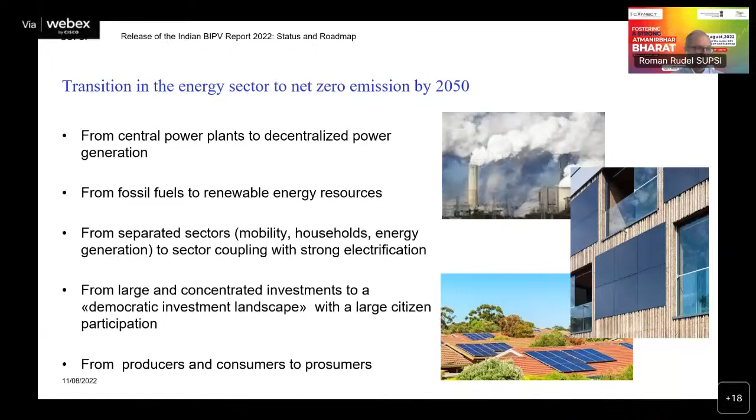Of course, this transition - and please, we can shift to the next slide - is not such an easy process. Now, you have the ambition in India to make a leapfrog, but even when you want to make a leapfrog, the process is not so smooth.

I just wanted to remind you with this slide of a rather interesting multi-level socio-technical transition process approach, which is becoming more and more popular also in Europe and the United States, showing that there is really a multi-level and multi-actor landscape involved in this transition.

And it's not so easy that every technical innovation will then also succeed in the market. I don't want to go deeper into this, but just to remind you, it is really a complex puzzle, and you have to bring a lot of elements together to make this transition successful.

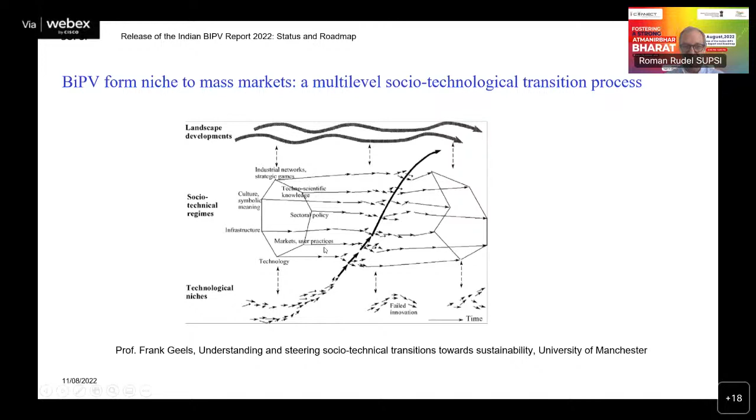With the next slide, we can say that, for example, in the EV sector, we have had this kind of success, and we have also reached the so-called tipping point where there is no return on this development. It's normally accepted that this is about 5% of new sales - in markets where you have more than 5% of EV sales, you have reached this tipping point, and this will then strongly accelerate the process and help shift to the new situation.

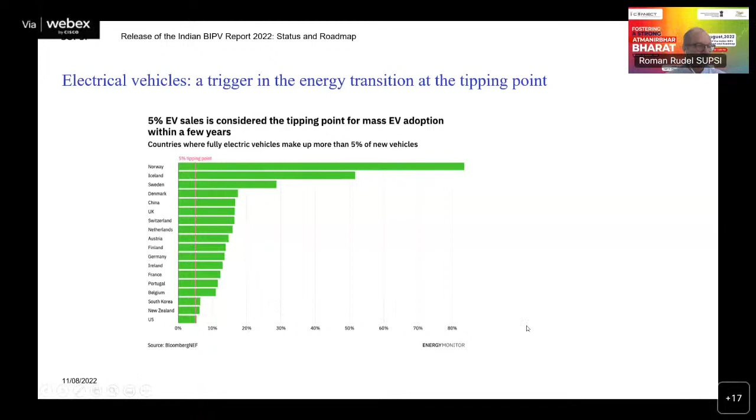Now, in BIPV, I don't think we can say already that we have reached the tipping point, but with the release - and this is my last slide - of this important status report, which also gives a roadmap on BIPV in India, I think we have reached an important point in this transition, and I hope we can soon show that this is also demonstrated with a market share where we can say BIPV has reached the tipping point in India.

So I think it's really important that we have this status report, and I'm very proud and honored to have participated in it, and of course I'm very curious about the reaction of the public, and in particular also of the Indian industry.

And we are also ready, of course, to participate in further research, further support to accelerate and to really help leapfrog in the renewable energy area in India. So thank you very much for your attention, and sorry for these short technical problems with connection to India. I would like also to wish you a successful event, and hope that there will be a lot of reaction and a lot of new ideas coming out of this meeting. Thank you very much.

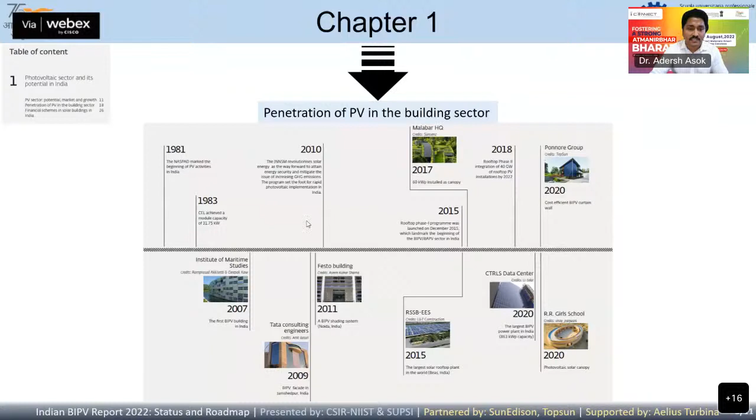Our solar PV tariff has met a record reduction of similar to 2 INR per kilowatt hour, marking the effect of the solar national mission. This section reiterates the evolution of the PV sector in the country, with a few milestones for its adoption in the building sector, highlighting huge potential for solar adoption there. The first chapter also discusses the renewable power sector of India and financial schemes for existing building solar schemes in India, and compares the global acceptability of rooftop installation.

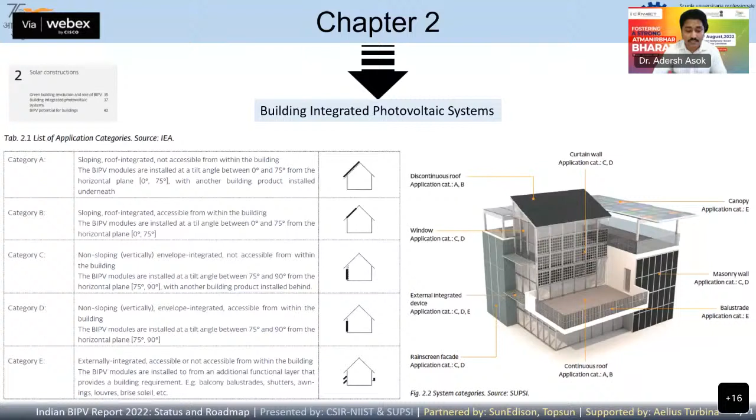As you can notice here in this section, we discuss the classification of BIPV, different BIPV elements, and we have also tried to define BIPV and discuss the application of BIPV elements adopted for building schemes. This section is expected to avoid the ambiguity that exists in the case of BIPV definitions.

We have also covered the solar potential analysis of different regions, as you can see in this chapter, with the BIPV score that we have come up with. An interesting fact to note here is that in the southern region of India, in Thiruvananthapuram, the orientation between east to southeast has more BIPV potential than facing south, as in regular rooftop installation. More details can be found in our report, as this is an important point for policymakers to think more seriously about, considering vertical installation for inclusion in financial schemes going forward.

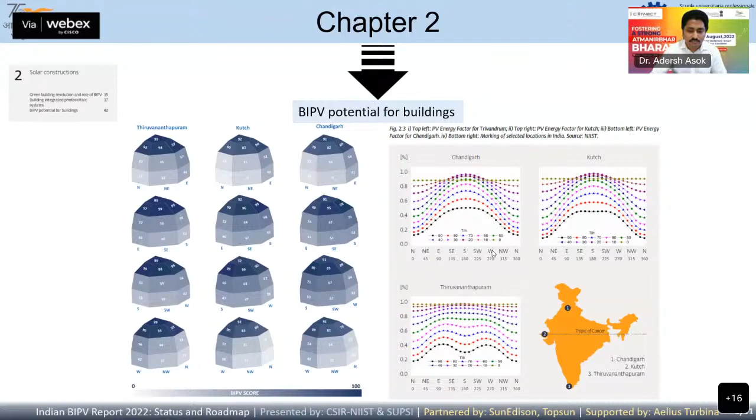In the third chapter, we have focused on five factual contemplation levels to initiate and define a collective and concrete roadmap for BIPV implementation in the country. This includes government policies, initiatives and business models, multifunctionality and cost reduction, technology readiness, both on the supply chain and certification requirements, and innovation landscape. Basically we focus on the research projects and engagement of the international community, which is a prerequisite for getting different BIPV product segments into the country.

In the fourth and final chapter, we have included a few representative case studies to analyze the BIPV sector and its installation in the country. Basically, it will highlight the potential of BIPV in the country. The awareness is growing in a larger way, but favorable policies will take it forward to more fruitful outcomes in the near future.

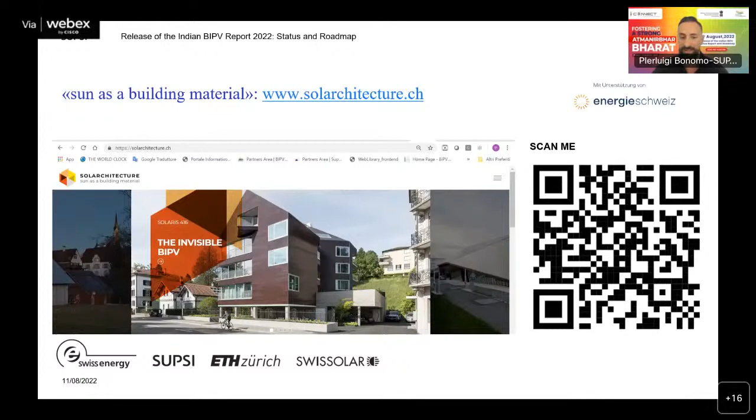photovoltaic technology. And I reported here the reference platform for solar architecture that we set up some time ago with the collaboration of ETH and Swissolar. And I invite all of you to take a look at this website, because you can find all the latest realized examples where PV technology is used and implemented as a real building skin material.

But on the other hand, from an optimistic point of view, we can also say that in Europe we had a very fruitful development period, since we have available on the market more than 200 products today, and also more than half of the installed capacity today is in the European area.

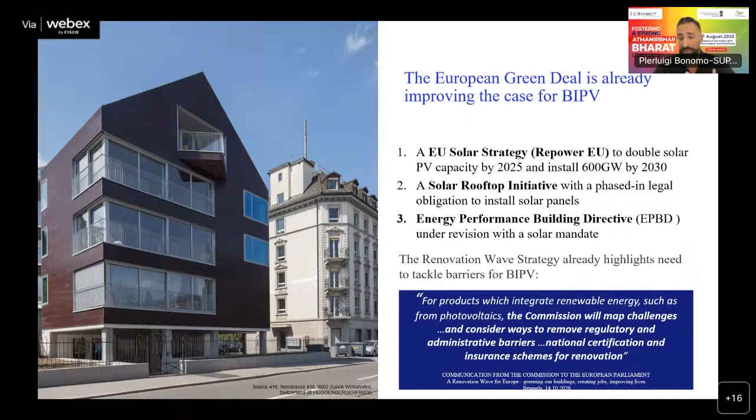At European level, we have a lot of initiatives, just to mention Green Deal and Renovation Wave, which are really a huge strategy, really highlighting the need of implementing BIPV and of joining construction challenges such as renovation with active building schemes. So what's the role of research in this framework, and which are the main activities of SUPSI and of our research group in this framework?

And I started with this slide, which already presents the results of these activities, since we can say that a very strong relation between applied research and industry and market during the recent and past years brought ready products to the market today. So today we can rely on multifunctional products ready for marketing and for real implementation in the building scene. And I reported here some Swiss examples to provide the evidence that we managed to address a really huge portfolio of different and flexible solutions.

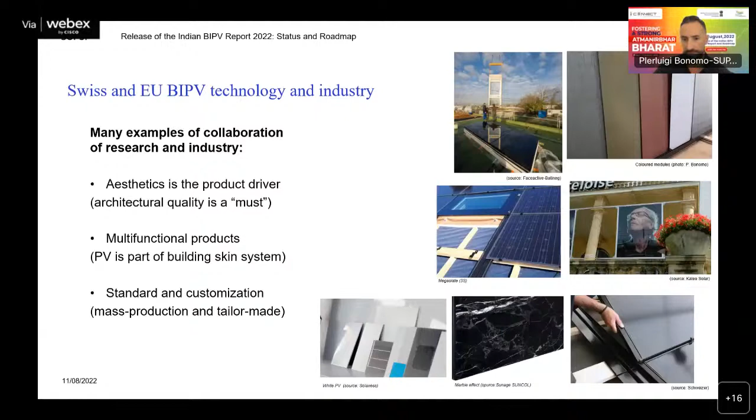So key steps of this transfer process are the validation and the qualification of products. And we have a PV testing lab at SUPSI for providing indoor testing, qualification and assessment of the technologies. But more and more we work at a real scale level, focused on real scale mockups where we can observe and test technology in real operating conditions. And last but not least, in pilot projects. This is a key step for assessing the technology at a real building scale and in an operational environment.

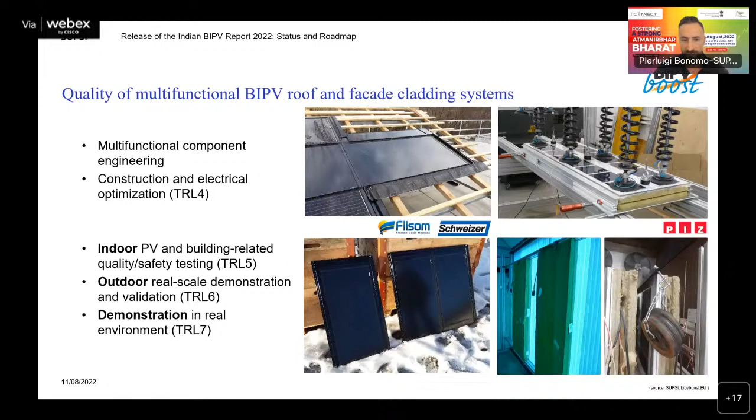I just want to conclude this part by saying that pilot projects are a key part of this technology validation. So more and more we are working with real architects and real players of the value chain to construct buildings with active facades. Just a few examples here, but my colleague Paolo Corti will briefly report about one specific project.

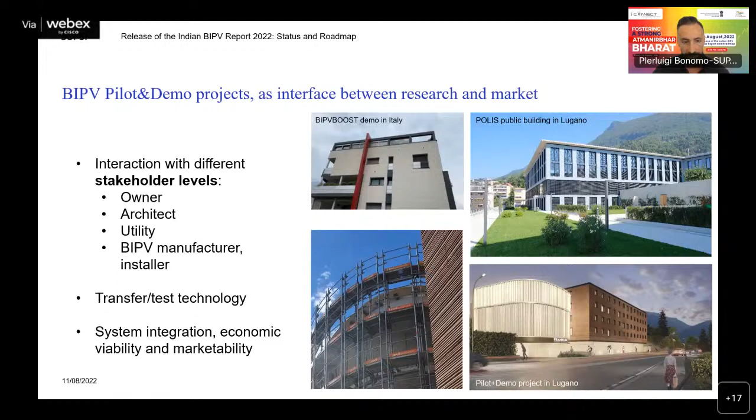So how to sum up the challenges of BIPV? This would be quite an ambitious goal, but I will try grouping four main key aspects, mapping the main challenges that we believe are the key drivers for implementing this technology on the market.

So first of all, the industry, the manufacturing. Here, of course, it's needed to combine standardization and customization, which are the two trends which BIPV needs to put together and to optimize. On the other hand, products need to be implemented on the market. And here the topic of certification of the products is crucial. In Europe and in Switzerland, we know this topic very well.

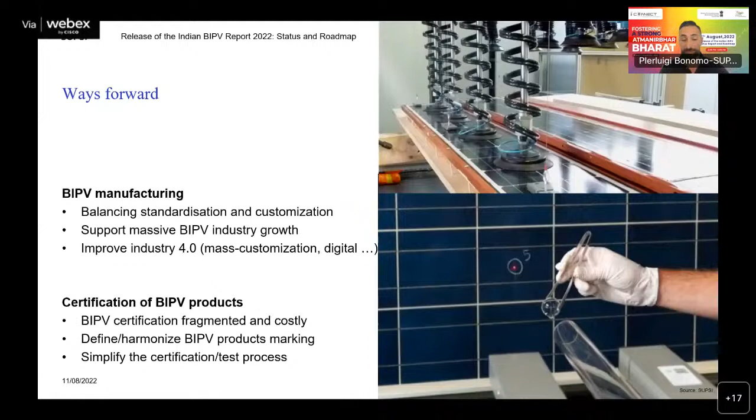We are working very deeply on defining new testing procedures and new methodologies, because basically BIPV is a multifunctional technology. So we really need to bridge together the construction world and the photovoltaic and electrotechnical world. So this is more and more important. I'll just finish with the other two ways forward that I would like to list today.

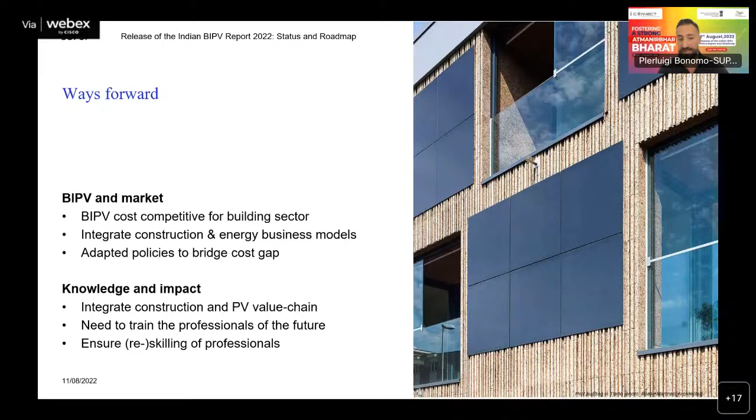So technology is the starting point, but as Dr. Rudel said at the beginning, we also need to favor the real impact on the market. So this means that cost competitiveness is a key challenge for implementing BIPV in the building sector, and also creating knowledge. So creating new skills among professionals is a key challenge for us to ensure this technology evolution.

I just conclude with a thank you to the working group of this status report, because I think we addressed a specific topic like building integrated photovoltaics, and we also tried to draw up the roadmap for this technology. We are really glad that we had the possibility of learning some first perspectives about the Indian context, and we are really committed and interested to foster strong BIPV implementation in India. And I'm really proud that our group, which met in 2019 and exchanged this memorandum of understanding, today managed to realize this first milestone and report.

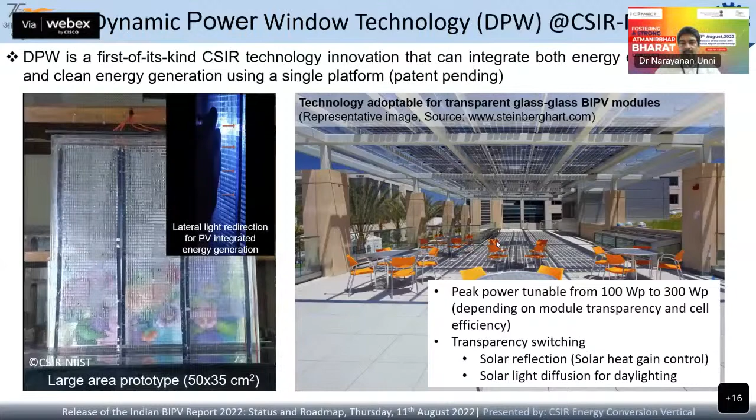So you can have solar heat gain control and you can have solar light diffusion for daylighting. So this is a concept which is shown here. This is a technology adaptable for transparent glass BIPV modules, where the solar light with a diffused rendition you see here, you can use it as the indoor lighting also.

Now, the next one is the DSSC module fabrication facility for building integrated photovoltaic and indoor photovoltaic at CSIR NIIST. We had a project funded by Department of Science and Technology, Government of India. This project was selected in high priority implementation category by Prime Minister's Office, Government of India, wherein for the first time we developed a range of equipment which are required for fabricating large area solar modules. You can see that we can go up to 30 centimeter by 30 centimeter DSSC panels.

And with the chemistry that we know, because National Institute for Interdisciplinary Science and Technology traditionally has expertise in photochemistry, photophysics, material physics, material chemistry, we can actually tune the properties of the dyes that are used in these solar cells. You can have different colors. So not only power generation, but an angle of aesthetics also can be incorporated into these windows.

So these are some of the equipments that we fabricated here. The interesting thing is that earlier people used to import these equipments, but with this project, we could in fact demonstrate that these equipments could be made in India with a cost reduction of 50 to 60% compared to what we used to import. So all the process starting from glass cutting, screen printing, silver dispensing, annealing, dye coating, hole drilling, UV dispensing, UV curing and electrolyte filling. All these are now done in a semi-automatic fashion, and the facility is here.

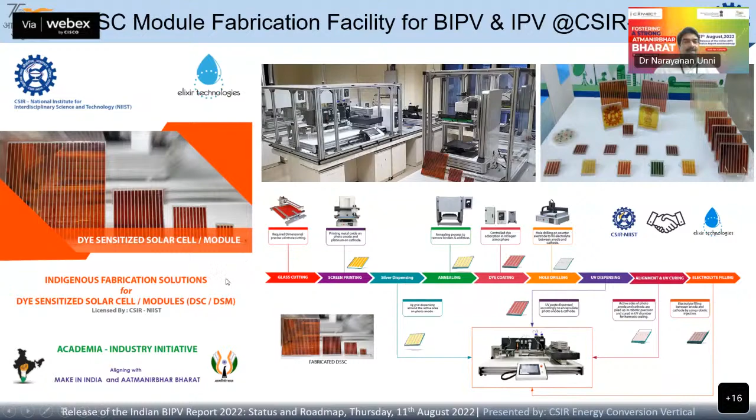So whenever any one of you comes to Trivandrum for a conference or for a personal visit, I would extend an invitation to visit CSIR NIIST and see these facilities, because it is first of its kind in India. Dr. Suraj will give more details about the DSSC fabrication facility because there is another talk coming up, so I will not spend more time on that. Now, the third one is the light concentration photovoltaics, CPV.

Also at CSIR NIIST, we have developed planar light concentrating optics elements, which can give a 5 times concentrated solar flux and also with a high solar acceptance angle. Normally, we know that concentrators are there, but the solar acceptance angle is not great. But in our case, with suitable optics and modification of the microstructural design within the panels, we can have higher solar acceptance angle, and it can be easily adopted for BIPV architectural facades and all.

And see here, an example is given here. Whatever solar flux is incident on this will be concentrated again to the edges because of the optical design. And with that, you can see this fan is running. And also, again, you can have colored solar tiles. It's not only the normal transparent in nature, but other than that, you can incorporate pigments or polymeric materials into this, and you can have different colors. Again, as I mentioned, not only energy generation, but it can have an artistic or aesthetic angle also.

And with that, you can control the transmission. You can see that each of the edges here, these junctions, there are solar panels. We don't see that, they are hidden. But at the same time, you can tune or design these panels so that you can have a particular wavelength which will be allowed to transmit. So that is the color that is shown on the ground. So this, on an ideal level, is proven at CSIR NIIST, but it's a long way to go. In fact, there's a lot of ramifications in building design and construction of facades.

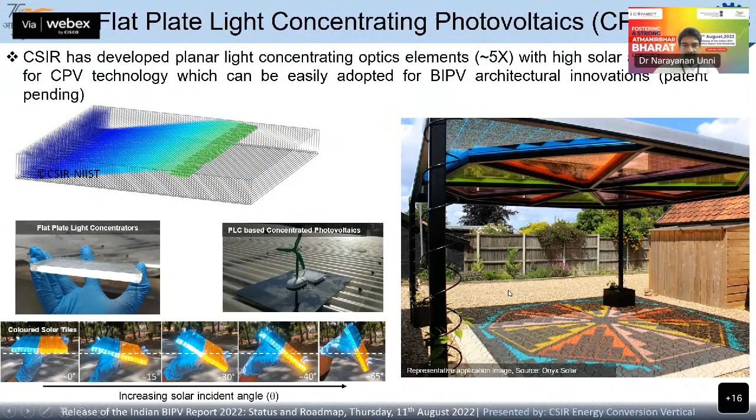Another important activity from CSIR NIIST is rooftop agrivoltaics. As we all know, agrivoltaics is also getting a lot of momentum nowadays. There's a program by Government of India called PM KUSUM. KUSUM is Kisan Urja Suraksha evam Utthaan Mahabhiyan. So that is the program for increasing the yield of farming along with generation of energy. So in Hindi, we say Annadata, a farmer who provides food, he will become Urjadata also. Urjadata means who provides energy.

And agrivoltaics is there for some time, but simply planting solar panels in fields will just lead to solar desertification only, because you cannot keep anything under that. It is only a shady area. But with our innovation, now we can control the transmission. Diffuse optics is possible, so you can have certain plants which can have low lighting conditions. And this is very good also, because when you control the incident light, sometimes leafy vegetables like lettuce, their leaves will become larger to absorb more light energy. So that increases the yield of the cultivation also. Along with that, you can generate power. So that is the idea behind rooftop agrivoltaics coupled with optics.

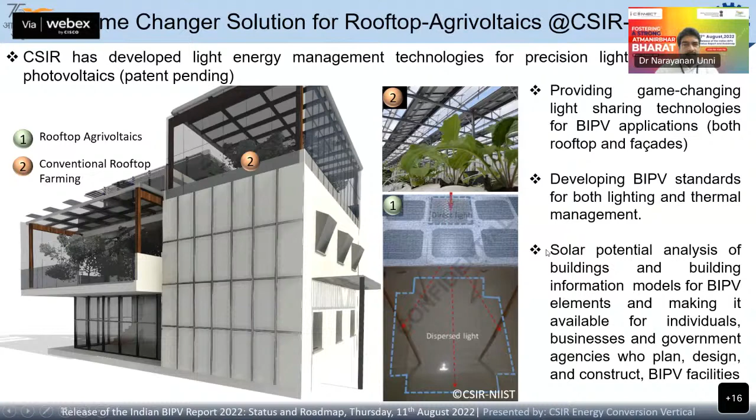And then immediately the application is that it can go to rooftop. Instead of having solar panels on your rooftop, if you use this rooftop integrated with agrivoltaics, then you can have your cultivation, agriculture also on the rooftop. And it can have different manifestations. It can be horizontal, it can be vertical with a large acceptance angle. And the solar potential analysis of buildings and building information models, we are also working on that, particularly for BIPV elements. And we can make it available for individuals, business, and government agencies. So modeling studies and providing feasibility reports, all these are possible with the current expertise available at CSIR NIIST.

Now, CBRI, Central Building Research Institute, another constituent lab of CSIR, they have an activity on efficient flat plate solar water heater. Solar water heater is already there, but the innovation here is that the scientists at CSIR CBRI are using a double glazed solar collector. With that, they can achieve the highest efficiency. For example, when the plate temperature is at 100 degrees Celsius, the efficiency is 60%. The industry standard is around 30% only at the moment at that high temperature, 100 degrees Celsius.

And the working principle is simply convection: hot water is collected in the tank through natural convection. The important features are, as I mentioned, a double transparent glass cover is used to reduce the convection losses. The heat loss coefficient of a double glazed collector is much lower than that of a single glazed collector. So that is the innovative element behind the realization of this solar water heater. And they have the expertise in doing the numerical modeling and the heat distribution. All those things can be done.

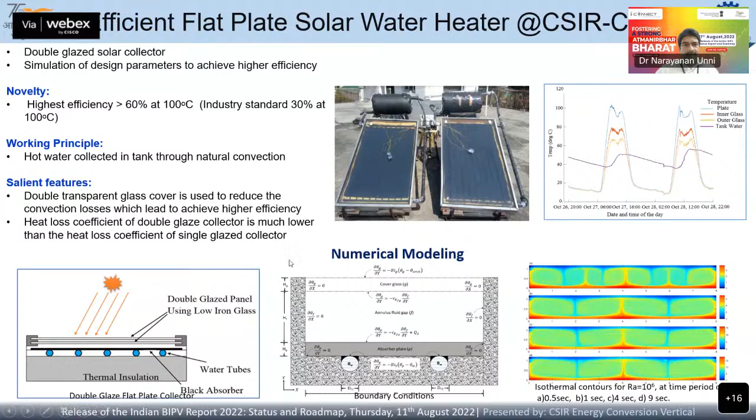CSIR-CSIO, Central Scientific Instrumentation Organization, as the name indicates, is good at designing and developing equipment. There is activity on designing and developing equipment required for photovoltaics, and also in particular for building integrated photovoltaic.

PV elements are becoming an integral part of the building. Professor Roman was mentioning that we are at the tipping point, 5 to 10% adoption, meaning the technology is ready to be adopted by the general public. We believe at that time there will be requirement of equipments, inverters, and other things. So CSIO, a constituent lab of CSIR, is ready with such expertise.

They have measuring devices for testing and evaluating the performance of both grid connected and off-grid solar photovoltaic systems, which can be installed in buildings and industries. They also propose to develop a solar photovoltaic performance analyzer for BIPV, because the performance analyzer for simple solar panels may differ from what is useful for BIPV. These considerations should be taken when designing a performance analyzer or system for BIPV. CSIO is doing that.

CSIO has also created facilities under CRTDH, a program by DSIR, Department of Scientific and Industrial Research, called Cooperative Research and Technology Development Hub. This will test a 30 kVA solar inverter with a regenerative grid simulator, anti-islanding testing device, the way you connect and disconnect from the grid when power failure happens, loading rheostat, programmable DC power supply meter, grid connected inverter, signal oscilloscope, DCCT power adapter for multi-channel, and digital power meter.

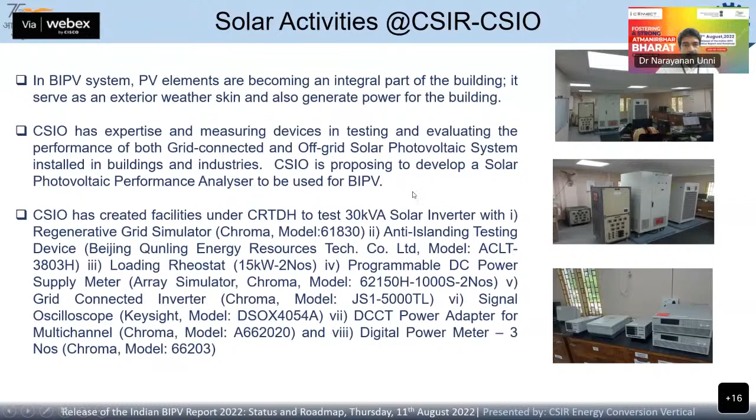Some of these equipments are simple, but so far we have been importing them, and now with CSIR we have in-house capability and expertise to design and develop these equipments.

CEERI is the Central Electronics Engineering Research Institute, a lab specializing in electronics. As the name indicates, they are working on the electronics of solar PV panels and accessories. CEERI has developed a solar PV-based EV charger for 2- and 3-wheeler applications. Presently, work is going on to develop charger systems which can work with grid or solar input.

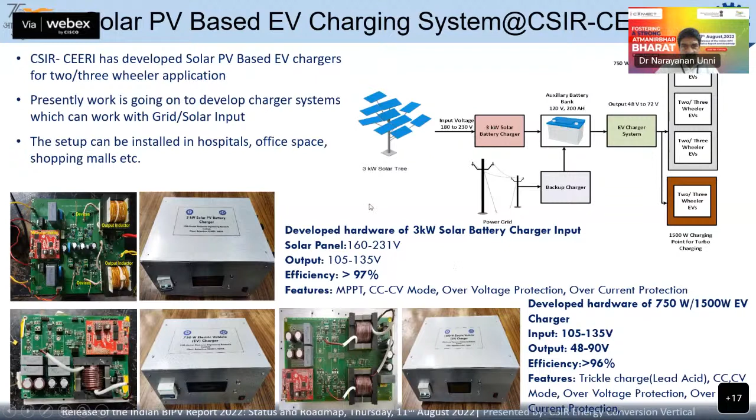This hardware is developed. A solar panel of 160 to 231 volt can be used with output of 105, 135 volt. Efficiency is 97%, with maximum power point tracker, constant current, constant voltage mode. All these things can be done with the system developed at CSIR-CEERI.

CSIR-CEERI also has, in the Jaipur center, an NABL accredited solar grid tied inverter test facility. NABL is the National Accreditation Board for Testing and Calibration Laboratories. They have given accreditation to the solar grid tied inverter facility developed by CSIR-CEERI at the Jaipur center. You can see these certification numbers for MPPT efficiency, inverter efficiency, photovoltaic systems, and islanding prevention measures.

This will become very useful once we have a specialized BIPV testing and validation facility, which we are trying to develop. At that time, all these things will become very useful, and these are the specifications for the system they developed.

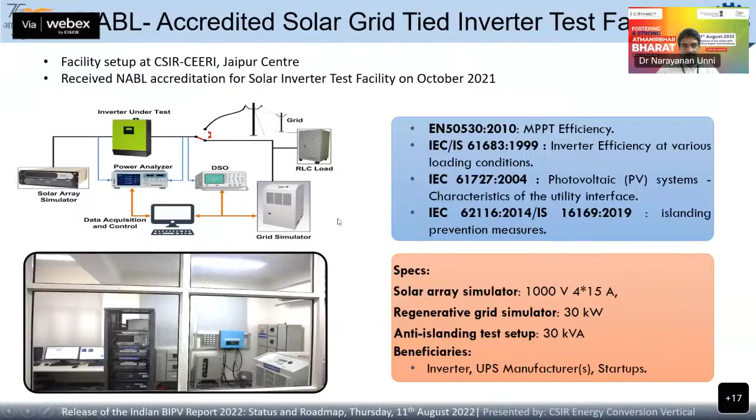As I mentioned in the beginning, a lot of activity is happening in almost all 14 labs working with the energy theme, E2D theme, in materials, because it's the basic building block of any building integrated activity. In dye-sensitized solar cells, which can lead to BIPV, we have activity on photoanodes, new dyes, electrolytes, device structures, and indoor photovoltaics, which is again a unique feature. We can proudly say that CSIR catalyzed the activity of indoor photovoltaics in India, particularly at NIIST.

NIIST, NCL, CLRI, IICT are the labs currently working on DSSC. There may be a few other partners also, so I couldn't put all the names here, but these are representative examples, not a limiting case. In perovskite solar cells, again novel materials and device architectures. In organic photovoltaics, non-fullerene acceptors, donor materials, donor-acceptor porous organic frameworks - CLRI, AMPRI, IICT, these CSIR labs are working on developing these materials.

CSIO has an activity on flexible graphene films, which can go a long way when we have building integrated large area fabrication. The transparent electronics discussed in the morning at length - whether we need to go with ITO or silver nanowire films or any other technology - here they have a solution with graphene films, which is also now coming up.

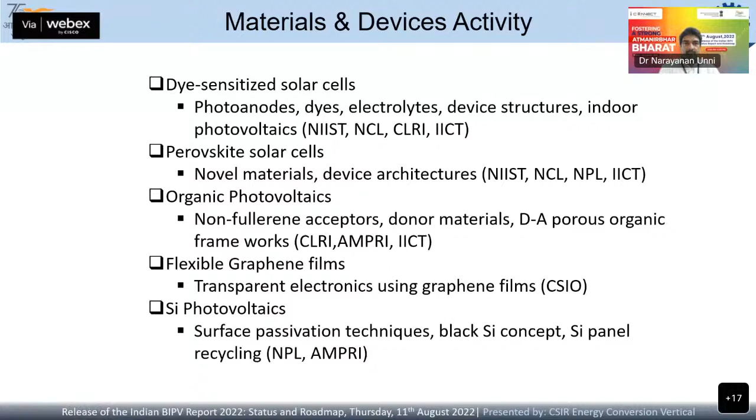Silicon metrology is also a very important activity. National Physical Laboratory, a CSIR lab, is the nation's metrology lab for standards, so it is their mandate to develop standards for solar panels, which they are currently doing. I hope with time there will be separate standards for BIPV as well from NPL. AMPRI is also working on surface passivation techniques and modifications for silicon solar cells. That is, in a nutshell, the CSIR labs' activity tied to building integrated photovoltaics.

In the Sustainable Development Goals of the UN, this work ties into affordable and clean energy, decent work and economic growth, industry innovation and infrastructure, quality education, sustainable cities and communities, partnerships for the goals, and climate action, which is again a very important topic. We have a serious presence in these sectors where we try to address some of the problems haunting humankind. With that, I was able to give a glimpse of activities happening in various CSIR labs on building integrated photovoltaic related activities. Thank you all.

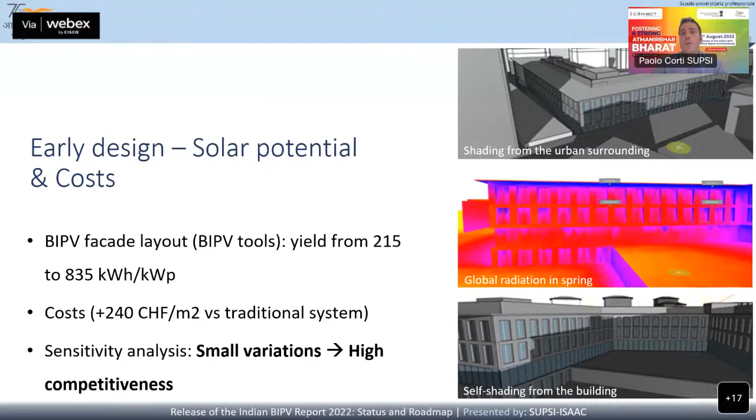The second stage in which we were involved is the early design stage. We support some stakeholders to assess the solar potential and the cost of the photovoltaic facade. In particular, we define the layout of the BIPV facade by using different and specific BIPV tools, such as BIMSolar, in order to calculate the solar radiation on the facade, but also the shading or the self-shading from the building or from the urban surroundings.

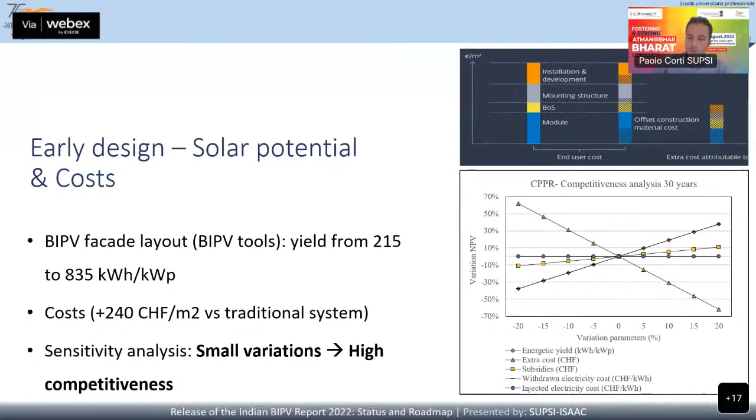Regarding the cost aspects, we define the real cost of investment by using the cost breakdown and the extra cost method. You can find more detail in the status report. We also produce a sensitivity analysis, and I would like to highlight that in this economical analysis, we saw that small variations of specific parameters, including energy yield and extra cost of subsidy, for example, could bring high competitiveness in terms of revenues of the BIPV solar system during the entire lifespan of these solutions—a 30-year analysis in this case.

Within the technical phase, we supported the BIPV manufacturer in testing and in the certification according to the IEC standards of the BIPV product. In addition, we also collaborate with the BIPV installers in the design of the electrical system. I would like to highlight our main results regarding the colored BIPV module: we measured a 25% power output reduction under standard test conditions, due to the color applied on the glass of this BIPV module. This was calculated against a standard non-colored photovoltaic module.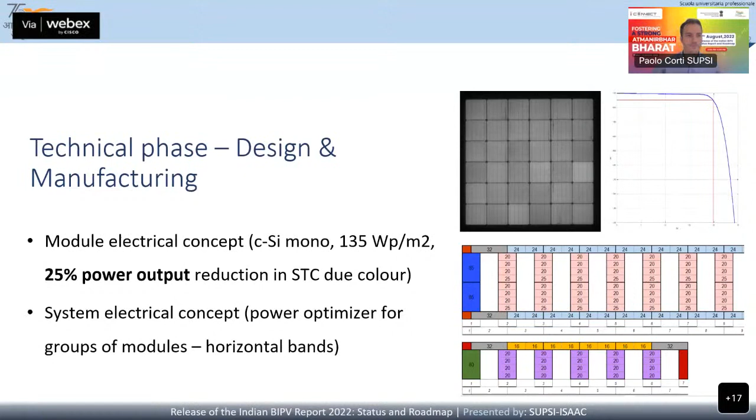We are working now at this monitoring stage. We monitor the photovoltaic production and the energy demand of the building, in order to assess a comparison between the simulated data calculated with a specific software in the previous stage and real monitoring data in terms of production, but also cost. In addition, since we have to validate and demonstrate the technology, we are also measuring some technical aspects of the BIPV module installed on the facade.

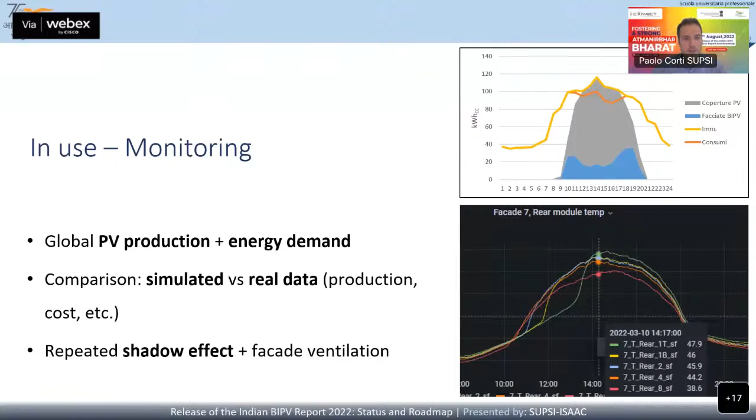So once again, we were involved in this complex BIPV process, and again we realized how complex the entire process is in order to make a BIPV installation. However, we also discovered, and this is a suggestion I would like to show you, that focusing on the decision-making process from the beginning permits anticipating all of those strategic decisions that are important to reduce risk and problems during the BIPV construction stage. In addition, interdisciplinarity—the interaction between all the stakeholders of the BIPV value chain—is a key takeaway for a successful BIPV project.

If you are interested to know more about this case study, please scan this QR code. You will find more information on the website, solararchitecture.ch. And thank you very much for your attention.

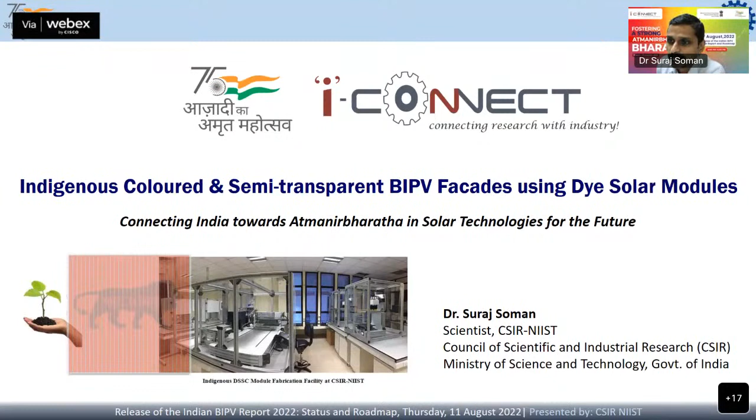Suraj, your voice is not coming. Is it coming now? Yeah. Oh, okay, fine.

As Dr. Ashish Lele mentioned in the introduction talk today, decentralized energy generation is something that we all need to focus a lot on. The major target is to generate electricity from renewable resources, of which photovoltaics, particularly the first generation, which occupies more than 95% of the market, has a major thrust. But one thing that needs to be looked into, particularly for developing countries, is gigawatt-scale installations and the unprecedented solar photovoltaic expansion happening around the globe.

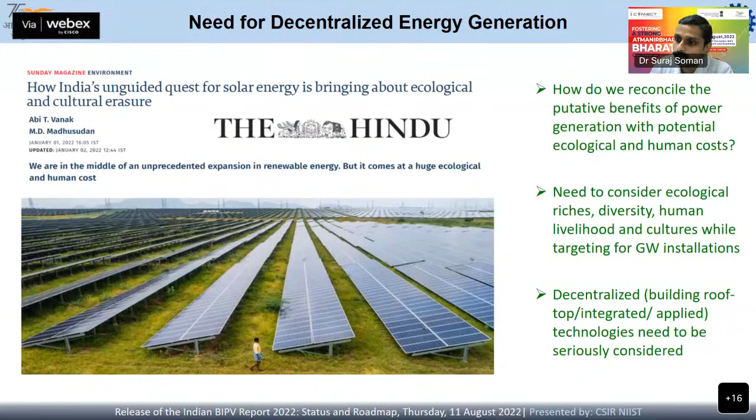This can lead to huge ecological and human issues related to diversity, livelihood, and cultures, particularly in places where there is no barren land. So that keeps the vision more focused on decentralized energy generation, where we need to target building rooftop integrated technologies for future generations. That is the relevance by which more focus needs to be given to the building integrated photovoltaic sector. Over the years, the majority of the BIPV market was occupied by roofing and walling.

And it is projected that in the upcoming years, facades are going to take more or less the same kind of market as the roofing sector. When we look into facades, it's particularly the glass area, and parameters like aesthetics, transparency, and colors need to be considered. That involves the area of research we are presently focused on, the third generation photovoltaic technology called dye-sensitized solar cells.

In simple words, it's artificial photosynthesis, mimicking the same process that happens in a green leaf in a device. It has a dye molecule, and you can change the color of the system by changing this dye molecule, changing the absorption spectra. It is incorporated inside a device with two conductive glasses and a semiconductor, to which the dye is adsorbed, and an electrolyte. There are multiple advantages. One is the semi-transparency. You can have any kind of color by changing the dye system.

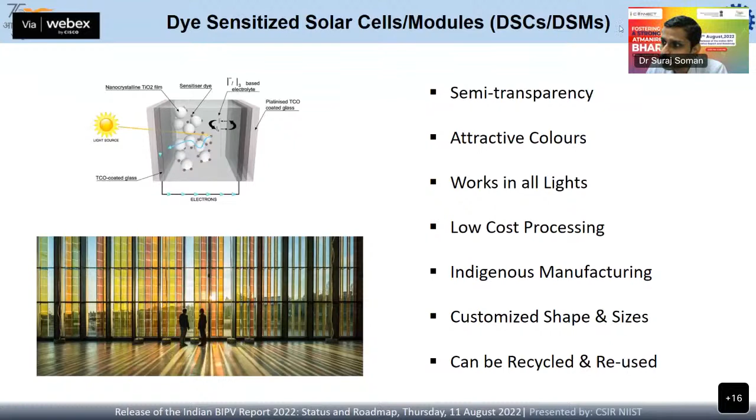Most importantly, it works in all kinds of light conditions. It doesn't need to be sunlight itself. It works well in artificial and diffused light, so it can have bifacial applications. Low cost processing, much cheaper materials, and less energy consuming processes are involved in manufacturing, and you have the possibility to move into indigenous manufacturing. You can make it in different shapes and sizes as per the requirement. Above all, these devices can be completely recycled and reused, leading to a circular economy.

Looking into the history of this technology, it was discovered way back in 1991 at EPFL in Lausanne, Switzerland, by Professor Michael Grätzel's group. Over the first 2 to 3 decades, the target was basic science development. It's not a mature technology like silicon or thin films, but in the last 2 to 3 years there were large installations: a 2 kilowatt installation at EPFL, the Science Tower in Austria with 25 kilowatts, and in China a 500 kilowatt installation of BIPV modules using dye-sensitized solar cells, really opening the eyes of the world to what can be done with this technology. Still more efforts need to be placed so that it can overcome the valley of death and move from science to technology.

So at CSIR NIIST, we are working in a truly interdisciplinary way, at the interface between chemistry, material science, device physics, and engineering. We are targeted at end user applications, and accordingly custom modifications are done on the molecules and material side. We target applications in building integrated and transportation integrated photovoltaics, portable electronics, and a major target on indoor light harvesting or indoor photovoltaics. And over and above all this, on supply chain development, which is very critical.

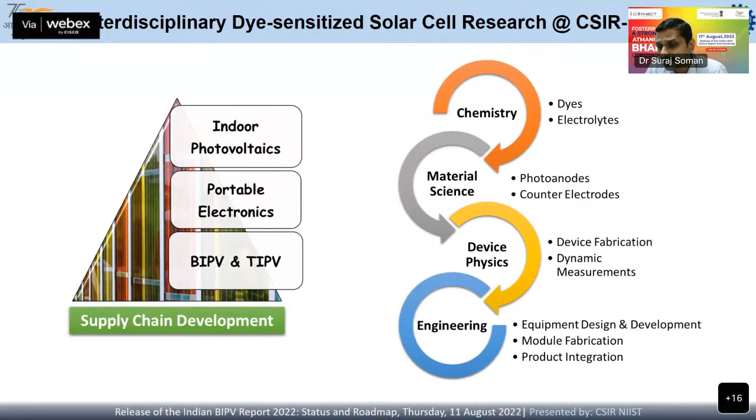This activity has been taken up for more than a decade in this particular laboratory, and also in CSIR through various national funding options like the TAPSUN program. We have gained the capability, understanding, and a portfolio of knowledge in the science and material parts of these device systems. With that, we moved into technology translation, creating an effective value chain from lab to market, from fundamental R&D to applied R&D, then to fabrication and manufacturing.

One of the critical aspects we addressed was indigenous equipment development, because if any technology needs to be sustainable, the equipment used for manufacturing must be produced indigenously, so that the cost of production can be reduced in a bigger way. With support from the DST, we realized true indigenization, developing a series of semi-automatic fabrication equipment for dye solar module fabrication, partnering with Elixir Technologies in Bengaluru, and realized a cost reduction of 60 to 70%. This was a major initiative in the country.

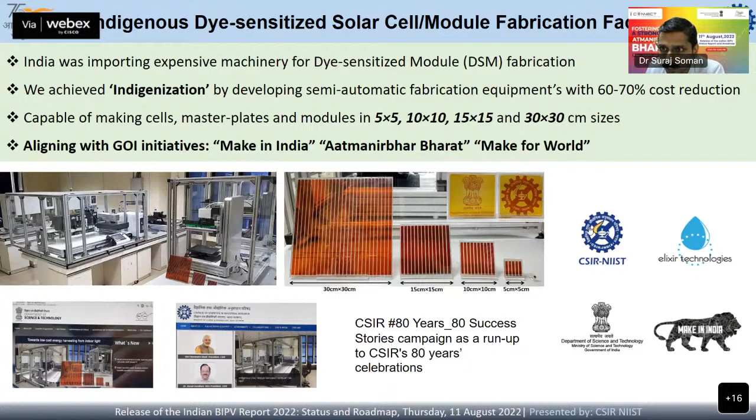We were able to go from small area cells to master plates and modules up to a size of 30 centimeter by 30 centimeter. This aligned with the Government of India's initiatives on Make in India, Atmanirbhar Bharat and Make for the World. It was showcased in various forums and selected as one of the technologies under the CSIR 80-year success stories. Moving ahead, this is the module process flow, as Dr. Unni has just touched upon.

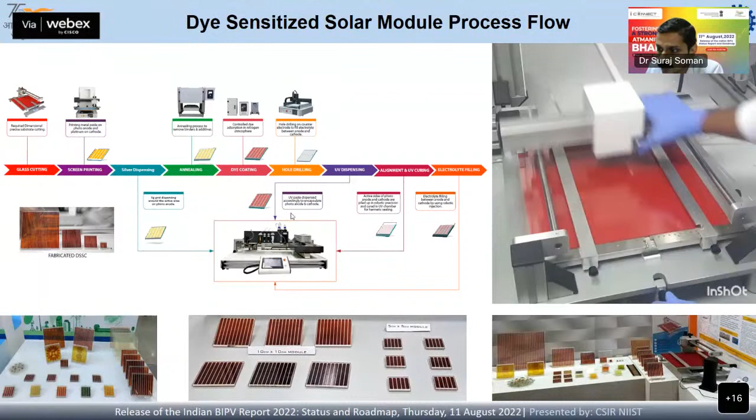We start with screen printing, and then there is a 5-head robotic system used for a range of applications: the silver grid lines, pick and place, electrolyte filling, and various stages of development, finally getting to the prototypes and the final product line.

Another major activity we took up was that once we have the equipment and the process, the most critical bottleneck was the supply chain. Unless you have a supply chain indigenously in the country, no industries will come up and take it into commercialization. So here, with support from CSIR, one of the most critical supply chains was the conductive substrate, normally the FTO, used in these devices. That occupies around 70 to 80% of the cost.

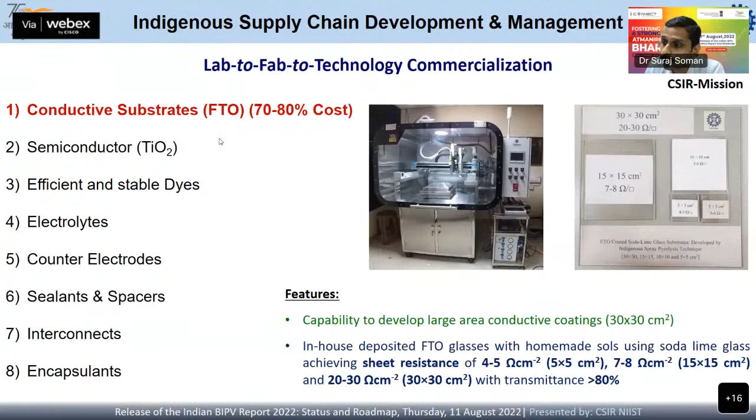In the last 2 years, we have indigenously developed systems by which we can make these conductive oxide coated substrates, benchmarked with performances comparable to what already exists out there. Along with that, we now have the technology and portfolio for a series of other materials and molecules used in this set of devices.

Another major activity: when we speak about building integrated or building applied photovoltaic applications, it's not just the things outside. We need to think from inside the building also, because, as in COVID times, most of us sit inside closed spaces and a lot of energy is around us, particularly in the form of light from artificial light sources. So how can we harness this energy in the most efficient and effective manner and use it for applications like self-powered IoTs and smart applications in this fourth industrial revolution era.

So there we focused on indoor photovoltaics, which has a potential of reaching up to 57% efficiency, depending upon the band gap of the material being used.

And out of the various solar technologies available, dye-sensitized solar cells occupy a very prominent position, with efficiencies reaching up to 35% over the past 2 to 3 years. And it offers the flexibility of integration into various electronic gadgets. And thereby, at the end of the day, what we target is to have a battery-free world and to recycle the light which is around us in various forms.

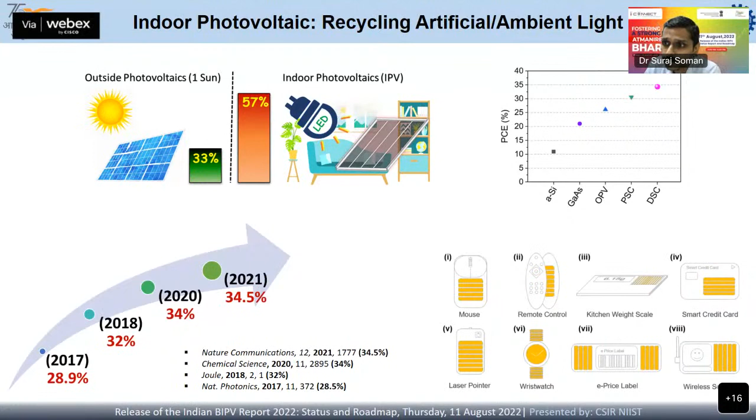So CSIR NIIST presently holds almost 5 world records on indoor photovoltaics, and we are actually the pioneers globally in this area, where under CFL light we have efficiencies reaching up to 35%, under LED light about 30%. Under ambient light conditions of around 6,000 lux, we have reached up to 40%, and particularly from the voltage point, because when it comes to energy harvesting circuits used for IoT applications, higher voltage is actually a prerequisite.

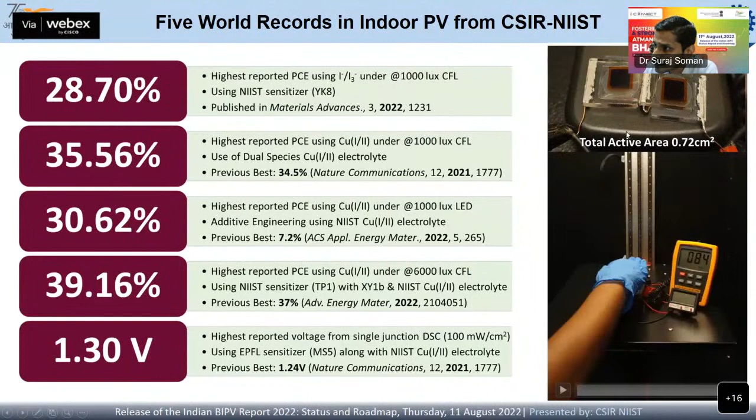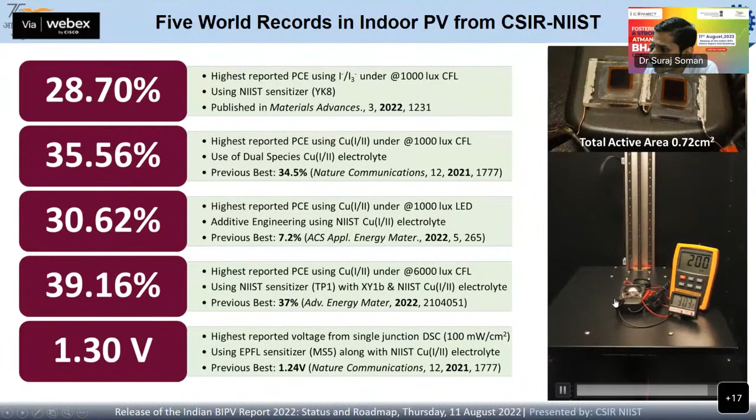So there, with our design principles and use of new materials, we have even reached up to 1.3 volts from a single junction device, so you can reduce the footprint of your devices. Here I will show you a quick video where a device less than 1 centimeter square was enough to power a temperature sensor. The intensity is less than 200 lux, and this less than 1 centimeter square device is able to power that particular device.

So this is where we are targeting, and the performance of our indoor photovoltaic light harvesters has been benchmarked with international standards. There are 2 companies that had released white papers on this indoor PV sector: one is Ambient Photonics from USA and another one is 3G Solar from Israel.

And based on their data, when we compare, we can see that with an active area which is 1/4 of what is being reported by these companies, we were able to generate at least 20 to 30% more power under the standard 1000 lux condition, and the same is reflected under the more realistic light intensities of 200 lux or less, also maintaining the same power density.

So in a nutshell, what we are targeting is to take our expertise in this area, from the science that we have done over the past decade, and the translational research and experience we have gained in technology development, and see the potential in various sectors like building, where not only building integrated systems, but furniture or artifacts inside the building can evolve to generate power in the indoor photovoltaics area.

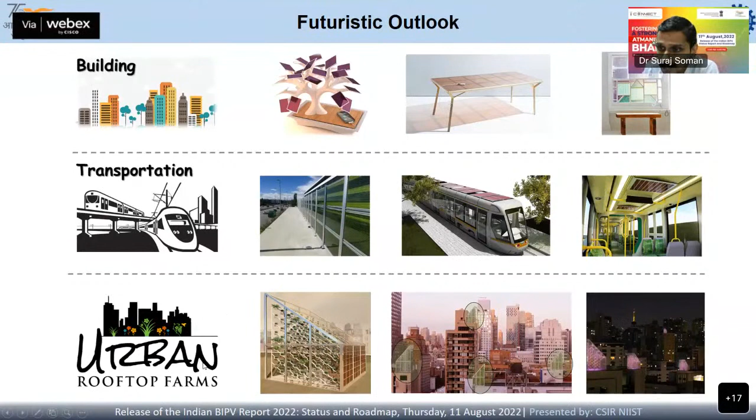In the transportation sector, like noise barriers, or trams and trains, both inside and outside light can be used, and some innovative applications like urban rooftop farms, where colors and aesthetics play a very key role for the future development of this technology.

So to conclude, we emphasize the importance and dire need for harvesting all forms of light, artificial, ambient, diffused, catered to the resurgence of this technology for BIPV and indoor photovoltaic applications in the country. Indigenous manufacturing and most importantly recycling and reuse is possible with this, which contributes towards the circular economy, and an end-to-end decentralized ecosystem and supply chain development is being provided for industries who are interested. And this finally leads to the goal of the government, which is import substitution and Atmanirbharta in solar technologies for the future.

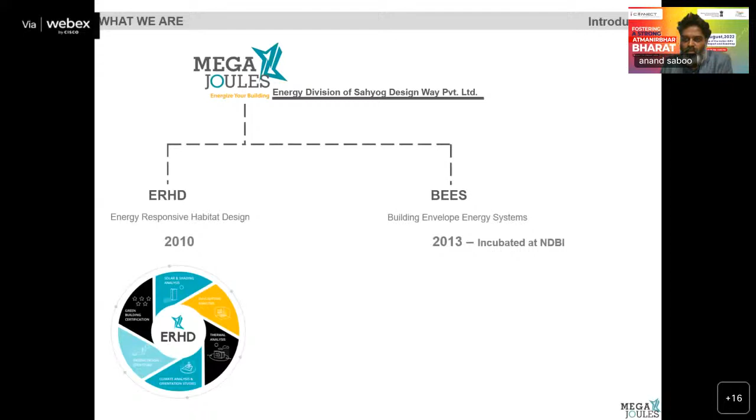We were incubated at the National Design Business Incubator in Ahmedabad, which is the startup wing of the National Institute of Design, where I have done my master's. There we looked at these envelope systems, and we installed our first system into the building where we were incubated. It was a small 1 kilowatt system, installed on the east side of the building, and we recorded the data.

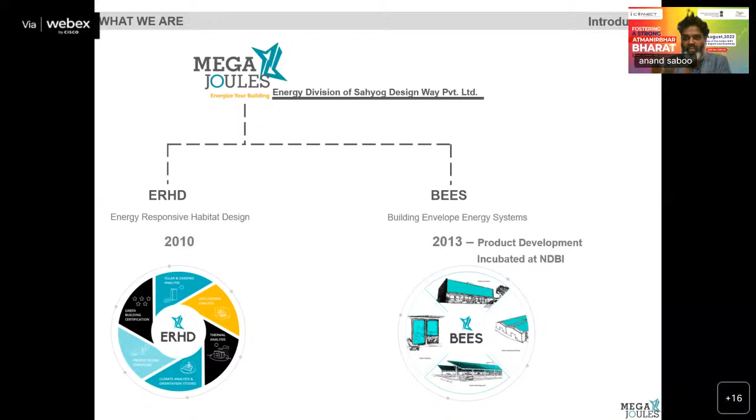We recorded the data, and then we started looking at various projects, and the real-time data was much better than the simulated data which we had predicted. In 2014 we pitched for the project with the data we had looked at for a year. And this is the latest image, from 2022, of Atal Akshay Urja Bhavan, MNRE's main corporate building coming up on Lodi Road in New Delhi.

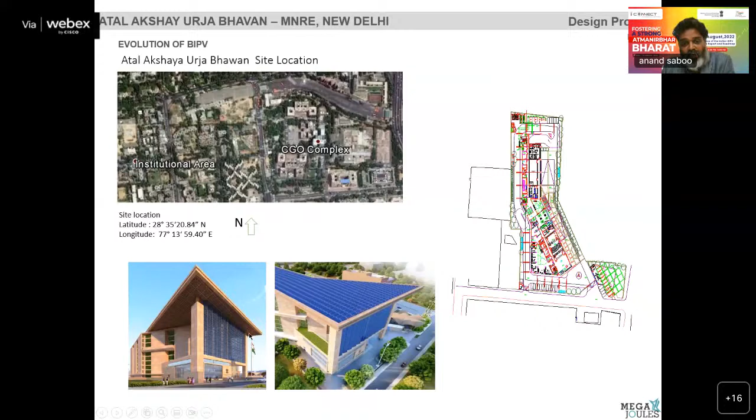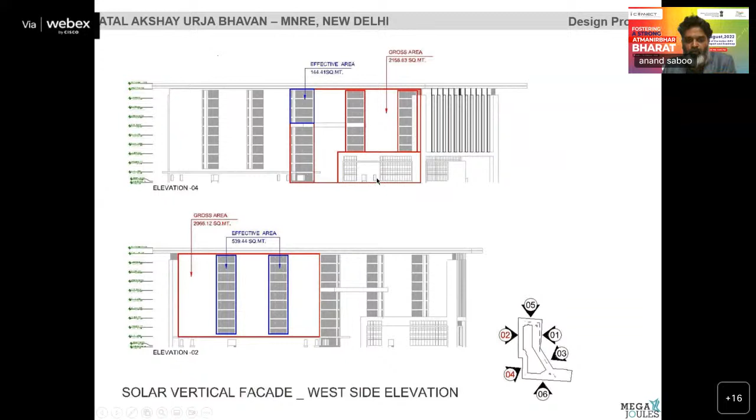We were fortunate to look at this design, courtesy of Edifice Architects, where we assisted them through a complete design process on how they could integrate solar. This is the final image, but the journey started in 2014 with a blank spot where the design was given. So we started its simulation with all 4 surfaces, giving them information on how the western, eastern, and southern sides would perform, looking at the efficiency, using the tool called BIM Solar, which was talked about earlier.

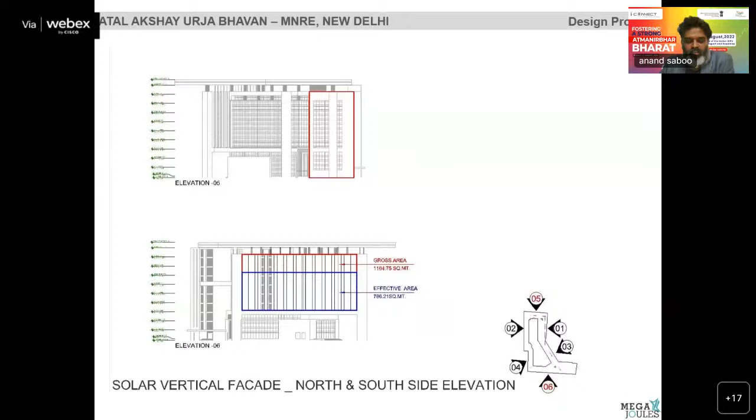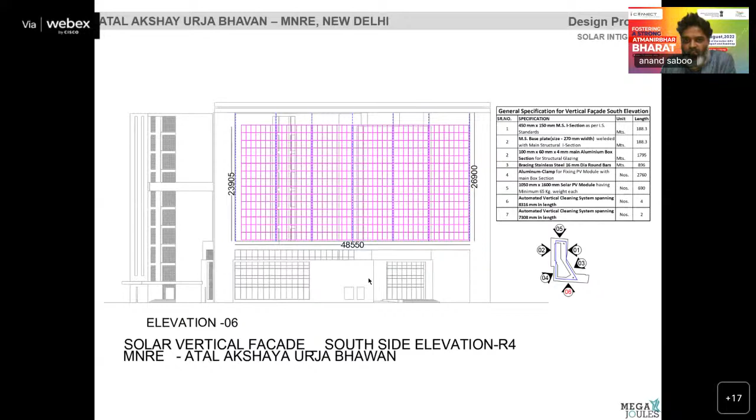We used that BIM Solar tool which was shared with us to generate simulated information. Then there was a final understanding that on the southern side, with that size, we would be developing a 200 kilowatt system. All the data and sizes were given, and then the system was tendered to the company. In the complete process, we had done all the simulations for the southern side.

The initial simulation was done in BIM Solar. At the later stage, people were not equipped with BIM Solar, and that's a challenge. That's a BIPV simulation tool, but we had to simulate in PVsyst to authenticate, because that was the system they were looking at. PVsyst was not that well equipped in 2016. It's a complex building, and the southern facade has to be simulated.

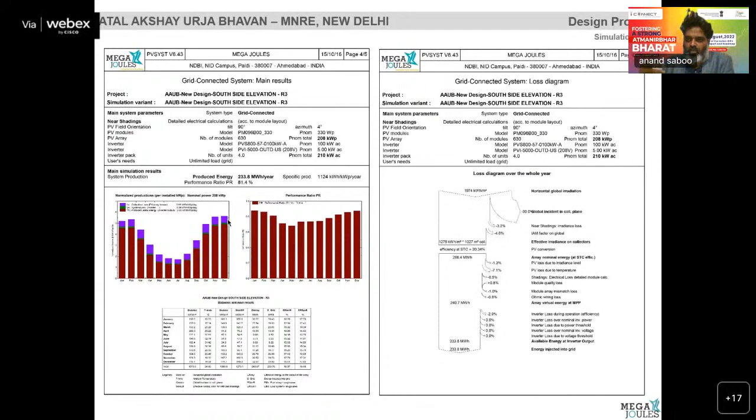We had to simulate it, and if you look at the curve, it's completely reversed from the rooftop curve, because in June and July, the summer season, because of the non-inclined panels, we were getting a reverse curve. That's fine, which we had predicted earlier, and that's how the journey and BIPV behavior in the Indian subcontinent looks.

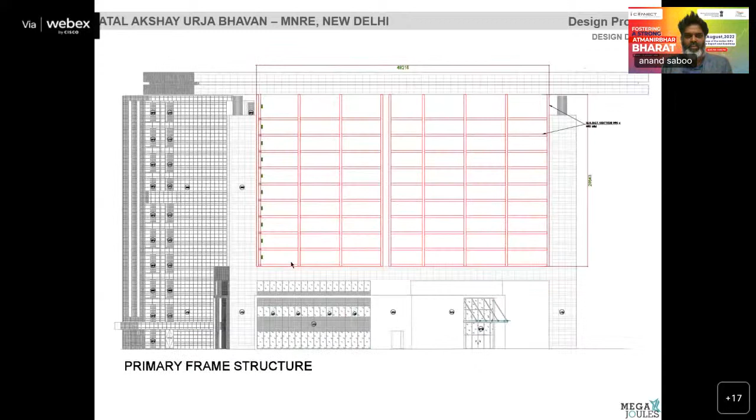And then the detailed drawings and details were also shared in the complete process, and the complete detail of structure and everything, because the wind load has to be taken care of in that aspect. And then finally, what sort of solar panels we have used: monocrystalline systems for this. And various other performance products were reviewed.

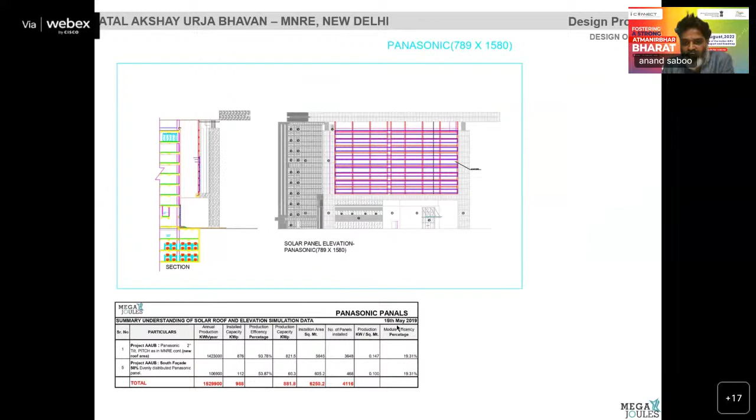This was in 2019. If you can see, it was Panasonic; their SunPower panels were also reviewed. So all the other panels were reviewed to look at the performance, because the project had initially started in 2014 and 15, and now it was 2019, so as a consultant, we have to review the latest technologies. And when we look at a large building process, the tender procedure also looked at what the latest technology at that point of time would be.

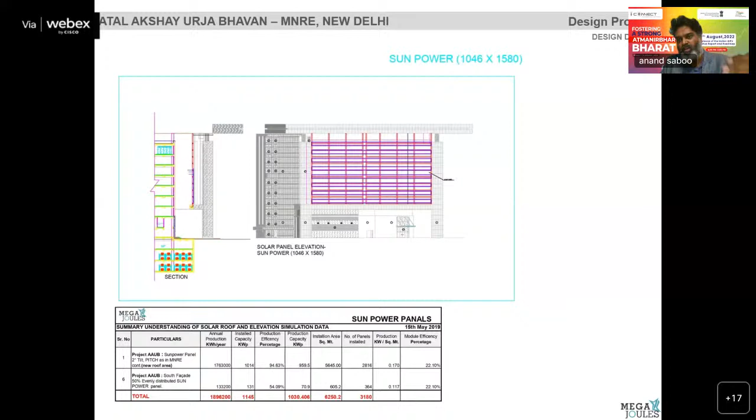I would say this is not the latest technology, but this was something which was cost effective and cost efficient in the investment and the return. And that's why the monocrystalline system was kept during the time of the installation process. And a complete detailed understanding was given to them about the efficiency, module efficiency, and number of panels which would be coming.

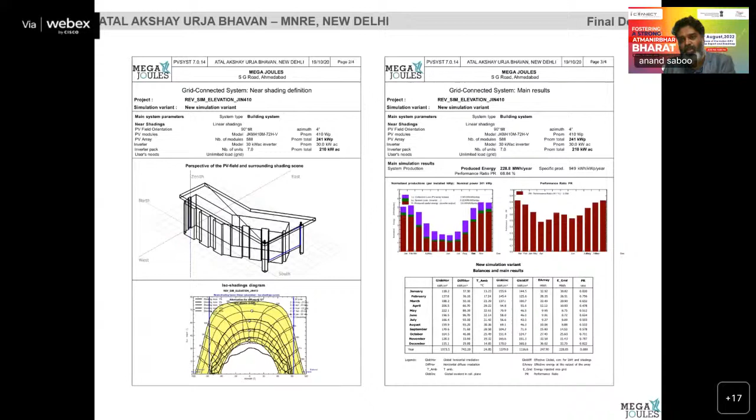And then the final procurement had started, because we have to relook at the latest technology and evaluate it as per the tender which was submitted earlier. And so the cost effectiveness also has to be reviewed. And the similar process of simulation was done again during the execution time. So we are under the limit where this much solar has to be generated, because this is one of the largest net zero buildings, and the thought was that this would be the benchmark building where net zero production has to be taken care of.

And yeah, this is the final output which I showed you. It's 1176 kilowatts of production. The roof is 945, and the wall which you see in front is 231 kilowatts of production.

I'll just look at another project which is much more experimental and a fun project which we have done, and that will be the final part. Here the cost and infrastructure, everything was available. But for the experimental part, I will come to a small project which we have done in Daman, which is the western part of India, a small island sort of system.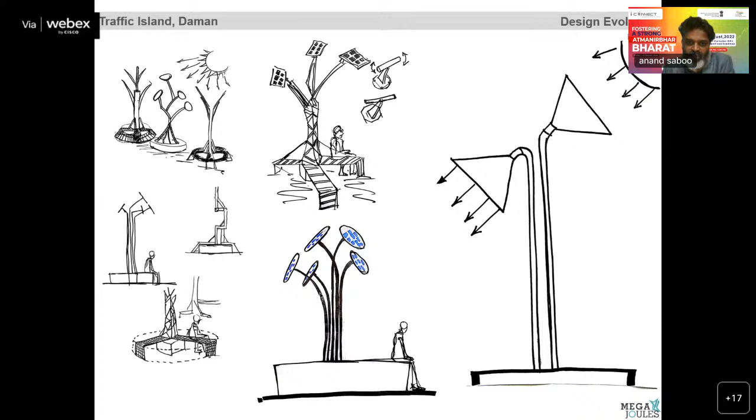So it is a small installation, an experimental project where we were looking at a small solar tree system where the sun comes, and the concept that we get light, and those sorts of thoughts evolved. And then the complete system was looked at, what sort of harness of the product would be there, which would reduce the battery part, at the location where the production is happening.

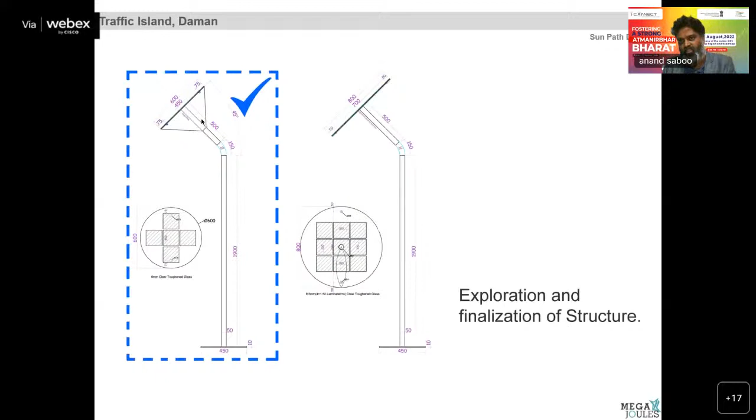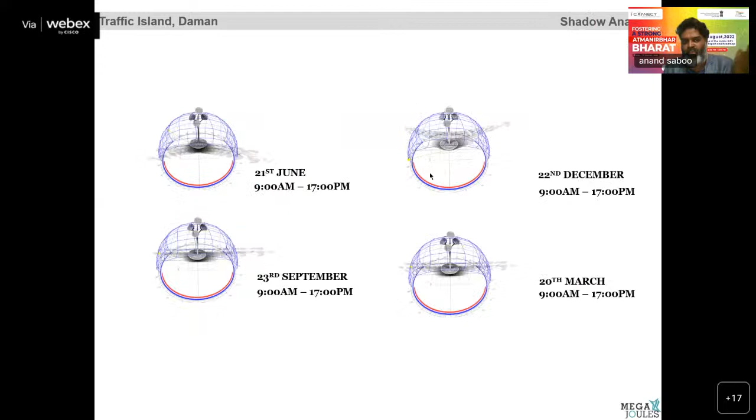The complete production shadowing impact was studied, and then the complete electrical systems and how it would look, the solar, the shadowing, and of course again the simulation was done. And then after installation we reviewed the production for a year. This production was also reviewed, and a third-party audit was also done by GERMI, which is located in Gandhinagar in Gujarat.

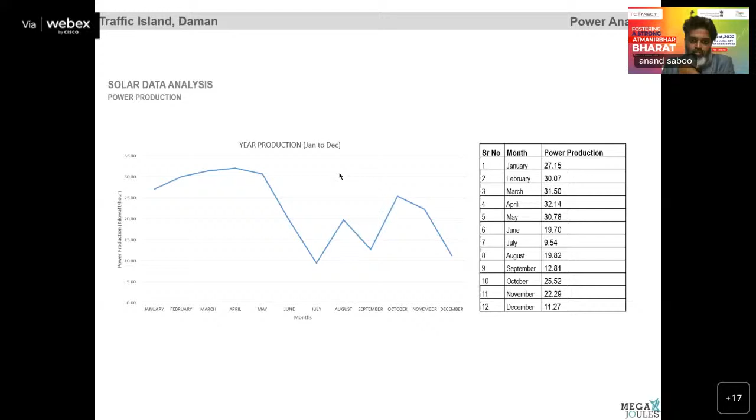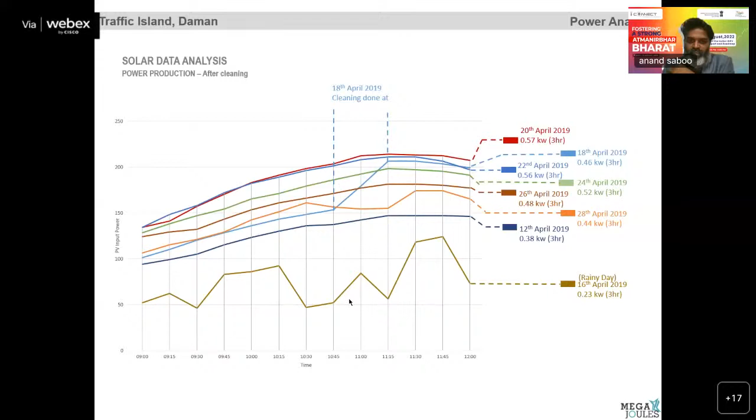And then we looked at all the production hours, how the production happens throughout the day. Of course, we had the monitoring system which looks at it, and this is the final product which you see. It's circular. Of course, it's again a monocrystalline system, but we have put it forward looking at other aspects. We have used stainless steel and insulated systems, so the panel also has sturdiness. And this is the 2 kilowatt system.

So when I look at, as an architect, what sort of work we have done and what challenges have come across, of course, as in the earlier presentation, the aesthetics, how it is integrated into the design process, and the journey of the complete design process to the execution and evolution of technology. It's 8 years from 2014 of conceptualizing it to when it is coming across here. So that's where we have to also look at the concept and also make the client and the team get acquainted with the latest technologies which are coming.

So we don't do something in 2022 which is of 2014. It was also relooked as re-evaluating the latest technology when the time of execution came across. That's the challenge I look at, because the journey time of the project is really important, and that has to be incorporated when you look at a large scale installation. And when we look at BIPV systems, there are all the other projects.

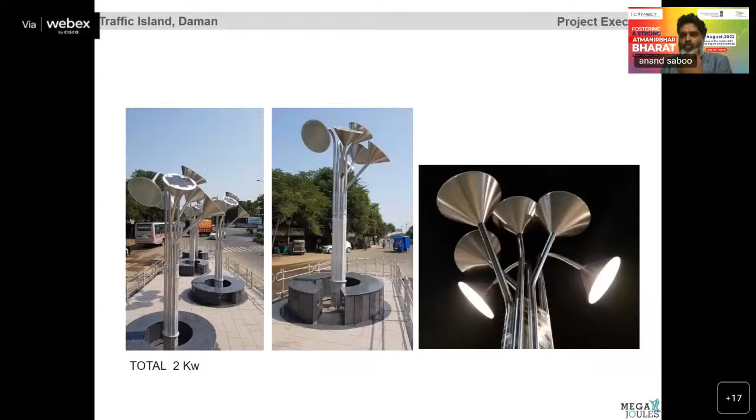That's where we also educate our client that this is a journey. When we look at 4 years of execution, 1 megawatt or 500 kilowatt or 200 kilowatt of production happening through the wall surfaces, we need to look at the journey, look at what sort of changes can come into the industry, and bring the best which is possible. Yeah, thank you.

Thank you, Anand, for detailing your experience with MNRE, especially on the Atal Akshay Urja Bhawan project, and the importance of project detailing, basically involving the BIPV from the design stage itself, and the challenges that you have faced. Thank you for sharing that experience. With this, we will move on to our very important section, the Indian BIPV industry section.

We have eminent speakers in this section. First, we will go with Mr. Pashupati Gopalan, co-chairman and CEO of SunEdison and co-founder and CEO of Ilasini Housing, for his talk as an expert from the Indian BIPV industrial sphere. Pashupati Gopalan is a thought leader and a visionary in energy and sustainability. He was also named Solar Power Person of the Year 2015 in India. With this short introduction, I welcome Mr. Pashupati to deliver his talk.

Over to you. Thank you, Dr. Ashok. Just a few words about Sun Edison, and then we'll tell you what we have done in BIPV. As a company, our heritage is more than 65 years old. We were the first company in the world to commercialize silicon, the foundation for the entire solar industry, in 1957. We've been doing solar business directly for more than 20 years, and present in India since 2009. We did many pioneering projects in India, like the Narmada Canal project, which the Prime Minister fondly shows off, and also many utility-scale first projects, and first rooftops in the country.

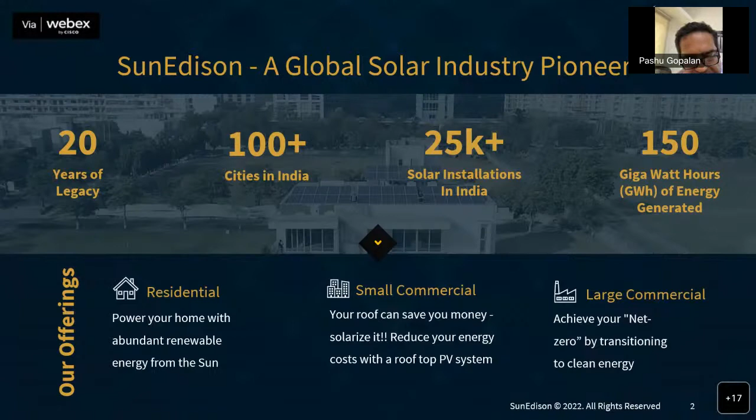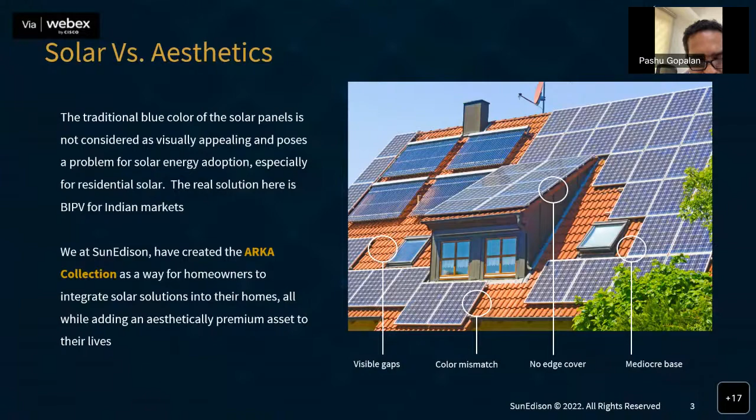Today I'm here to talk about a new line of BIPV products we are introducing. The reason is that general solar rooftop systems don't have visual appeal. Typically the color may be different and the system doesn't look as good, because some people go to great extent working with architects to build beautiful bungalows and villas, and the solar system with its color and design may not fit in, which can come in the way of adoption. So our effort was to develop a solar roofing system which can, from an economic perspective, replace the roof, giving the dual benefit of both the roof and generating renewable green power.

This is called the ARKA collection. If you go to the next slide, Abhishek. Basically, ARKA collection is based on solar tiles, each about 77 watt peak. These are designed for all weather conditions and can withstand very high wind loads of 170 kilometers per hour. They have completely integrated power electronics, AC/DB, and everything. Because of all this integration, there has been a lot of thermal challenge to solve. These are BIS approved and IEC approved as well, and can withstand category 3 hurricane, coming with a 25-year performance warranty with 24/7 monitoring. We also designed these power roofs as a gazebo.

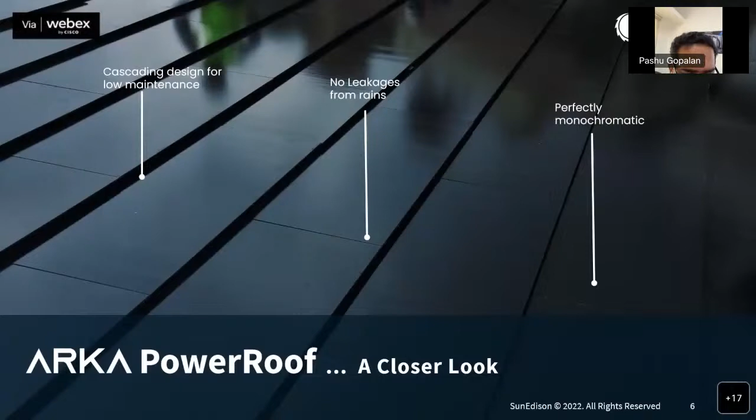I'll talk about it, but here's a close-up photograph of a real installation we've done in Bangalore. All of you are welcome to come and visit it. Basically, these are systems which can essentially replace the regular roof and be completely building integrated, essentially revolutionizing the space.

Since the theme of the discussion is Atmanirbharta and BIPV adoption in India, the biggest thing about this is it's 100% designed, developed, and manufactured in India. These solar tiles, which use mono-PERC cells, we build as glass-on-glass tiles, in India.

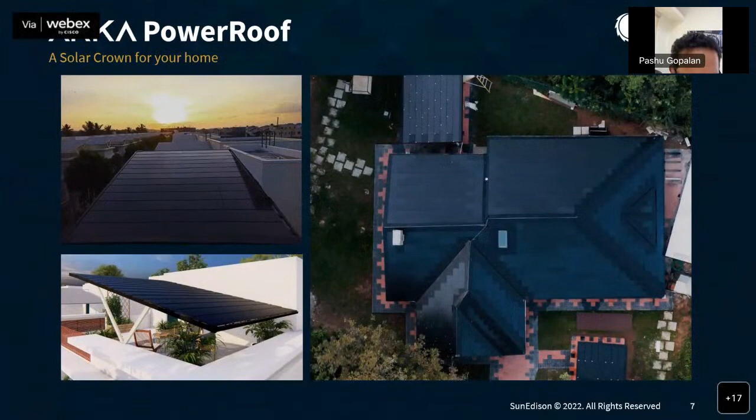That's all. I think all I'll say is we can also use them as a gazebo, which can be used to create lounge space and expand your living space in a garden or a terrace very comfortably.

Without compromising on the color - we do have 3 different colors - and the visual appeal, we can get this beautiful aesthetic solution, which is completely developed and manufactured in India, to give you both green energy as well as a beautiful integration to the built environment.

That's all, I just wanted to share these few words, and we are grateful to CSIR NIST, as well as the Institute of Applied Sustainability to the Built Environment from Switzerland. Thank you very much, we look forward to continue to work with you. We believe that this is a pioneering solution born in India, which will hopefully significantly change the adoption of BIPV in India. Thank you very much.

Thank you, Mr. Pashu, for maintaining the time. It is very insightful to go through the Arka collection, specifically for the aesthetic gazebo that you already have in the Bangalore Villa project. With this, we will move on to our next speaker, Mr. Jindo Joseph. He's Assistant General Manager of Topson Energy Limited. Jindo has experience of more than 10 years in the solar segment and has handled multiple BIPV projects, and is also involved in product development of photovoltaic glass units, focusing on glazing, solar rooftop tiles, and also the concepts of daylighting. With this short introduction, I welcome Mr. Jindo Joseph for his talk. Jindo, over to you.